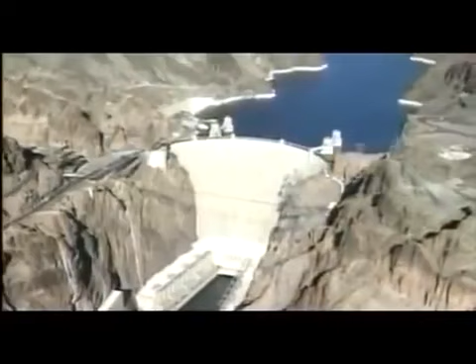726 feet high, weighing 6.6 million tons, and creating a lake 150 miles long, Hoover Dam is impressive and controversial. So were the people who built it: personalities such as the stern Sims Ely, the law of the land, and Frank Crowe, the feared and respected head of construction.

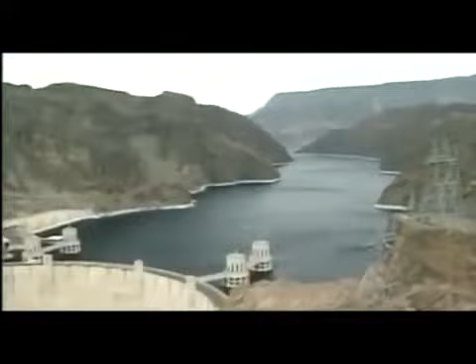Thousands labored to build Hoover Dam. Workers constantly struggled against the environment and often their employers. The damming of the Colorado River created Lake Mead, the largest man-made reservoir in the United States. Ironically, it's located in one of the driest places on Earth, 30 miles southeast of Las Vegas, Nevada.

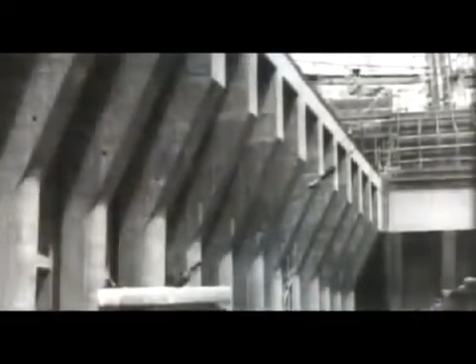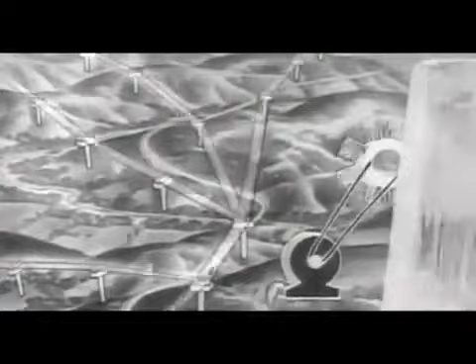Hoover Dam symbolizes the human spirit's discontent to accept nature's rules. Building the Hoover Dam was a colossal undertaking in 1931, the largest government project ever attempted. Constructed in the depths of the Depression, its purpose was to provide flood control, irrigation, drinking water, and electricity. It promised to change barren to bountiful.

Water is essential to life, and nowhere is that better understood than in the dry climate of the American Southwest. The Southwest is an arid area, and without a dam like Hoover Dam to control the flow of the river and make the water available when it's needed, we just couldn't have the level of economic development that we have in the Southwest today.

Thanks to the Hoover Dam, the Colorado River began irrigating more than 1 million acres of farmland. Cities sprouted, and Las Vegas became Las Vegas.

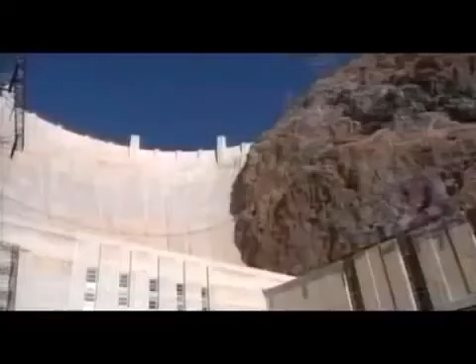Hoover Dam is one of the primary attractions for those visiting Las Vegas. At over 60 years old, it hasn't lost its appeal. More than 1 million people visit the dam a year. Overwhelming in its scope and size, it draws visitors from around the world. The dam's enormity is matched only by its dramatic history.

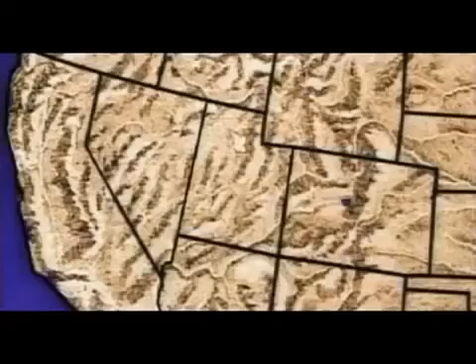The Hoover Dam was the first major attempt to tame the mighty Colorado River, the same river that carved the Grand Canyon. The 1,400-mile river drains water from 7 states: Wyoming, Nevada, Utah, Colorado, California, Arizona, and New Mexico, and delivers its precious payload to the Gulf of California.

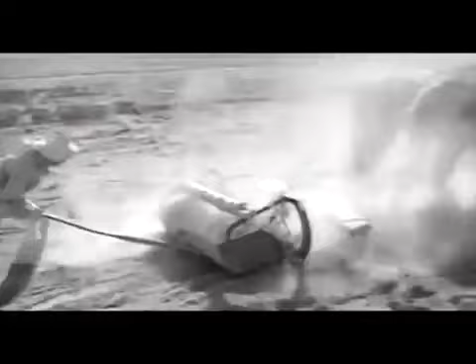Snow melting in the Rocky Mountains sends a torrent of water down the Colorado every spring, but then it dries to a trickle by summer. The early settlers who were trying to build an economy, build lives at the bottom end of this river, planted their crops, built their fields, built homes and businesses.

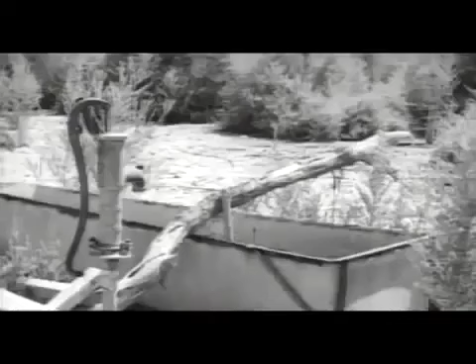In the spring times, those would be subject to inundation or destruction because of the floods coming down the river. And by the end of the summer, when the farmers really needed that water to get their crops to maturity, they couldn't get to the water. They needed a way to regulate the flow of the river, holding back the devastating floodwater in spring and delivering the life-giving water in the dry summer.

Man's attempts to harness the power of the Colorado River date back a century. In 1901, a private company constructed a canal system that brought water from the Colorado River and delivered it to the arid but fertile Imperial Valley of Southern California. California Development Company promised bountiful harvests in what was once barren desert. Irrigation would make it possible.

The company cut an opening in the western bank of the Colorado River and installed a headgate which controlled water flow. Initially, the system of small gates and channels worked beyond expectation. Fields produced a bounty of fruit and vegetables. It appeared as though the canal system was a major success.

Soon thousands of people flocked to the Imperial Valley with dreams of finding a new Eden. But their dreams soon turned into a nightmare. After several years of prosperity, the unpredictable Colorado unleashed its vengeance, reminding settlers how dangerous it was to play with nature's plumbing.

The problem was these were not very well engineered works, and they weren't very good. And the Colorado River in 1905 had a major flood come down the river, and it washed out these headworks and flowed into the Imperial Valley for 18 months.

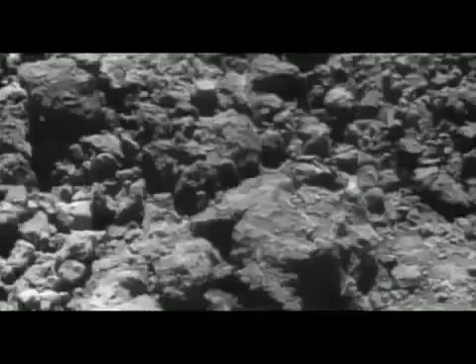Before the measure could proceed, the states had to decide on an equitable division of water. Water meant agriculture, cities, industry, growth, and inevitably there was some disagreement. Arizona believed California was trying to steal an unfair share of water. There's always a fight over water in the West. When water is scarce, there's going to be tension over water, and that was the case years ago. It's still the case today.

Herbert Hoover, then Secretary of Commerce, stepped in to break the stalemate that developed between the states. In 1922, 7 states signed the Colorado River Compact, which divided water rights to the river. However, the Arizona State Legislature, still not satisfied, successfully blocked legislation for several years. But finally, in 1928, the Boulder Canyon Project Act passed in Congress. It called for a high dam near a small railroad town named Las Vegas, Nevada.

The Bureau of Reclamation worked to design a dam like no other. The challenge was to design a structure capable of holding back trillions of gallons of water, built in a very high, yet narrow canyon. They considered 30 different designs before finding the answer. The final plan, a mammoth arched gravity dam.

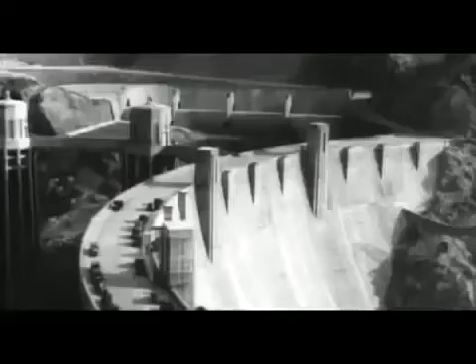Hoover Dam is a combination of gravity and arch dam. Gravity dams are dams that are just so massive, their own weight can hold back the weight of the water behind them. And then arch dams traditionally are built in the shape of an arch. It's kind of like an eggshell. An eggshell is very thin, but the egg itself is very strong. If you try to press in on the 2 ends of an egg, you'll find that you can't crush an egg. It's the strength of the arch.

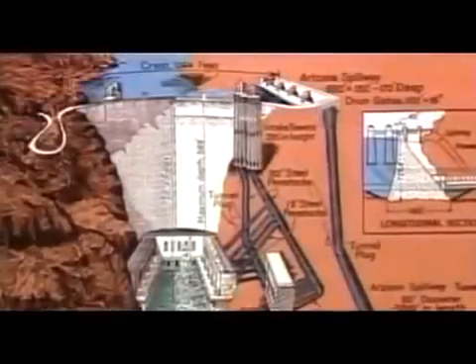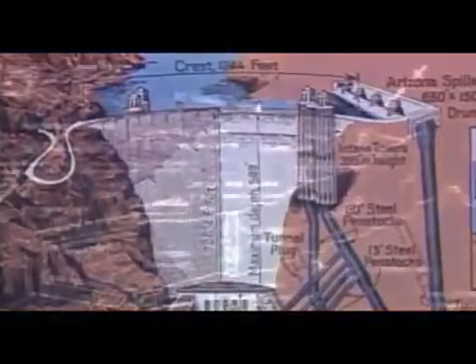The Bureau of Reclamation's planned arched gravity dam would be a behemoth, as tall as a 70-story skyscraper, over 2 football fields thick at the base, and capable of storing trillions of gallons of water. It would not only be the largest dam in the world, it would easily be the single biggest construction project in the history of the United States.

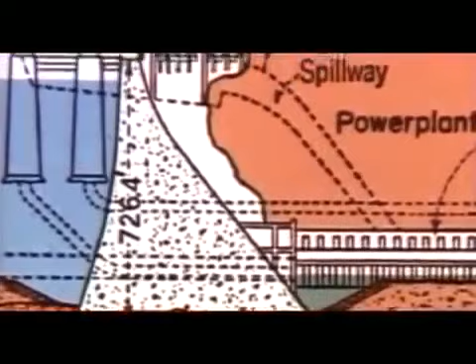But the immense size of the proposed dam was not the only obstacle. The dam would be located in one of the most desolate areas in the world. There was nothing here. I sometimes question the audacity of the people who had the courage and conviction to think they could build a dam out in the middle of a desert where nothing existed. There were no roads to the site. There was no power to the site. There was no labor force here. There was nowhere for the people to live who were going to come and build the dam.

In spite of all the obstacles, the dam had to be perfect, capable of handling even the greatest floods. If it were to fail, a wall of water would race down the river, killing thousands. Surveyors decided to move the location from Boulder Canyon to Black Canyon, 8 miles downstream. The move would allow for a bigger body of water, the largest man-made reservoir in the world.

Congress gave the go-ahead to begin construction. The task was great: hire an army of thousands, divert the river around the dam site, and form a mountain of concrete into a dam in the middle of nowhere. The question remained, could it be done?

Lake Mead, the reservoir created by Hoover Dam, contains enough water to cover the entire state of Pennsylvania with 1 foot of water. Hoover Dam will return on Modern Marvels.

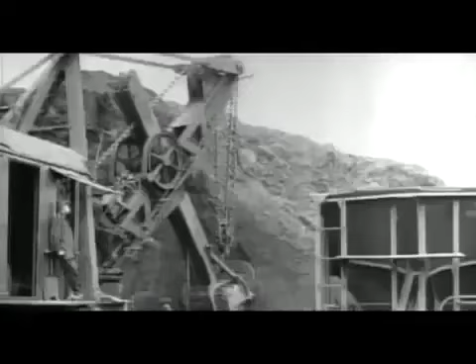In 1930, the Bureau of Reclamation's plan for controlling the Colorado River was extensive. The government would provide materials and certain services for the dam, but the dam would be built almost entirely by the lowest bidder from the private sector. But before the lowest bidder was determined, the federal government began working on the project. Good news for a nation entering the Great Depression.

The Bureau of Reclamation's first objective was to connect by rail Las Vegas to Black Canyon, the site chosen for the dam. Although the site had changed from Boulder Canyon to Black Canyon, the endeavor was still called the Boulder Canyon Project. People naturally anticipated the name would be Boulder Dam. The location switch caused some confusion, but at a railroad spike driving ceremony, Ray Wilbur, Secretary of the Interior under President Herbert Hoover, set the record straight.

Secretary of the Interior Ray Lyman Wilbur came out to drive the Silver Spike to begin construction of the railroad spur from Las Vegas out to Boulder City town site. And that day is the day he announced, well, we're going to call it Hoover Dam.

This was a year after the stock market had crashed and the Depression was settling in, and people were not at all happy with Hoover.

Despite the public's disapproval of President Hoover, they welcomed the job opportunities. People were desperate for work. Soon, thousands poured into the Las Vegas area in hopes of finding employment. Before the construction started, before they hired anybody, they came because they knew there was a chance of a job, just a rumor of a job.

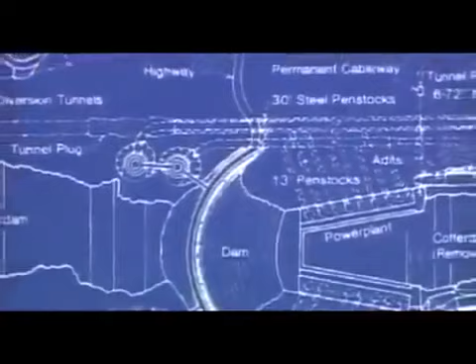The Bureau of Reclamation supplied plans to anyone interested, and it seemed everyone was interested in the largest government contract ever issued. The blueprints detailed an immense structure, taller than any dam in the world, 726 feet in height, and nearly as thick at the base.

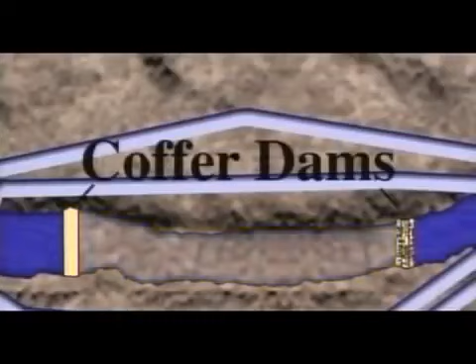The process of dam building called for tremendous diversion tunnels, 50 feet in diameter, to alter the course of the river, temporary cofferdams to provide a dry work area, and the pouring of 3.25 million cubic yards of concrete.

Nothing existed at the dam site. Concrete mixing plants, cooling plants, living quarters for 5,000 men and their families, cableways and metalworks had to be constructed.

The sheer size of the project intimidated even the most confident contractors. Build the largest dam in the world in the middle of the desert and do it in less than 7 years, the government-imposed deadline. There wasn't any company in the United States that was big enough to handle the dam.

So there were 6 contractors that got together and formed the consortium of 6 companies. Six Companies was composed of 6 giant construction firms, united for the sole purpose of bidding on the Boulder Canyon project. Each of the firms was familiar with big projects.

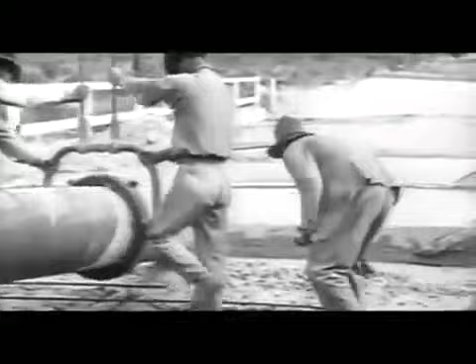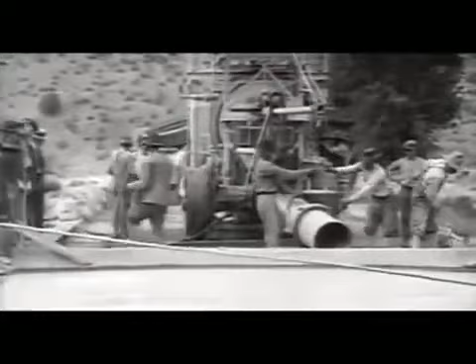They independently shaped the West, building railroads, tunnels, bridges, and highways. Between the six, perhaps they had enough experience and resources to build a dam of such great magnitude, but they needed someone who was respected in the field of dam construction to oversee the project, someone the Bureau of Reclamation would feel confident could get the job done.

They chose Frank Crowe to be their foreman here, the superintendent of the job. And he was a hands-on foreman. He didn't spend much time behind his desk. Frank Crowe was the most respected dam builder in America.

With him on board, Six Companies was ready to make a bid for the dam construction. On March 4th, 1931, the Bureau of Reclamation opened sealed bids. Of the hundreds of interested parties, there were only a handful of qualified bidders.

Tension ran high as each of the bids were opened. The Six Companies firm won the contract with the lowest bid of $48,890,955. It was the largest government contract ever awarded.

Blasting began almost immediately. Six Companies had their work cut out for them.

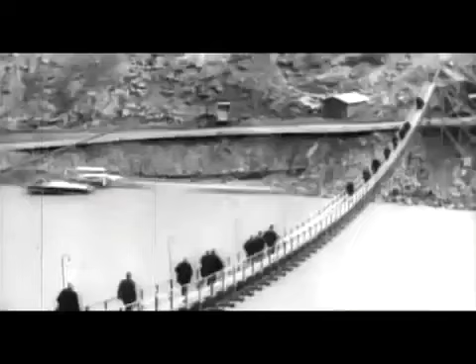Initially, even getting to the dam site was an obstacle. There were no roads from the rim to the bottom of the canyon. Men instead took small ferries to the dam site. Later, cableways were erected across the canyon to get men and materials to the bottom.

The first monumental task was diverting the river around the dam site. Engineers needed a dry work area in which to set the dam.

To add to the pressure, the Bureau of Reclamation initiated stiff fines for missed deadlines at each stage of construction. Four tunnels had to be drilled through the canyon walls to circumvent the site. The gigantic 56-foot tunnels averaged three-quarters of a mile in length and would carry the entire volume of the Colorado River. Workmen drilled blasting holes and loaded them with dynamite.

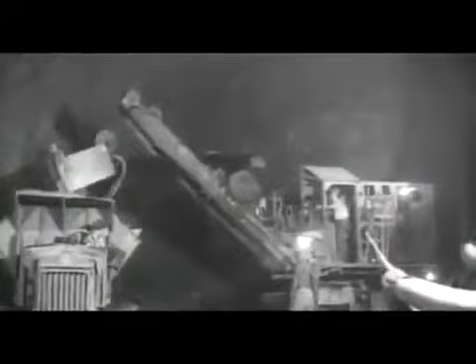A special three-story truck holding drillers at three different levels expedited the process. Digging continued for 13 months, drilling, blasting, and removing millions of cubic yards of debris. An endless stream of trucks removed blasted rock from the diversion tunnels and labored up a steep incline for disposal. Three shifts of men worked 24 hours a day, 7 days a week to keep the tunnels on schedule.

Frank Crowe was responsible for keeping things moving. The hectic pace of construction had its consequences. Heat exhaustion cost 14 men their lives. After the Depression and the crash, it was so difficult to get a job. Companies like the Six Companies could easily afford to cut a lot of corners in terms of safety and health of their workers, in terms of pay, in terms of comfort, and they did.

Tensions came to a head in the scorching summer of 1931. Striking workers demanded better working conditions, fresh water, and improved safety precautions. Six Companies responded by firing 1,400 strikers and hiring fresh workers readily supplied by the Depression. Frank Crowe was known as a fair man, but his hands were tied by the other members of Six Companies. However, soon after the strike, working conditions began to improve. In the end, when confronted with having a rough job or going hungry, most opted for the employment.

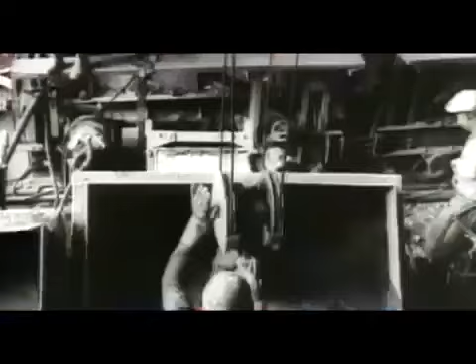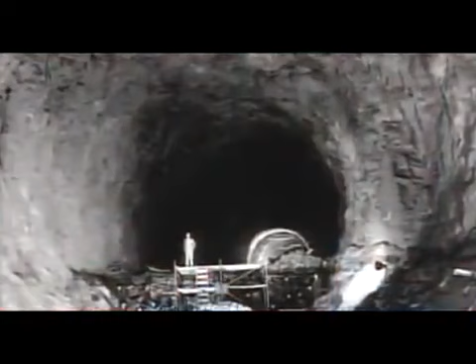More than 5,000 men worked on the dam at the height of construction. Frank Crowe, anxious about deadlines, often questioned their output. He used to take the VIPs around and give them a tour. Well, one of these wives of one of the people he was giving the grand tour asked, 'Mr. Crowe, how many men do you have working here?' He said, 'About half of them.' But Frank Crowe didn't kid when it came to deadlines.

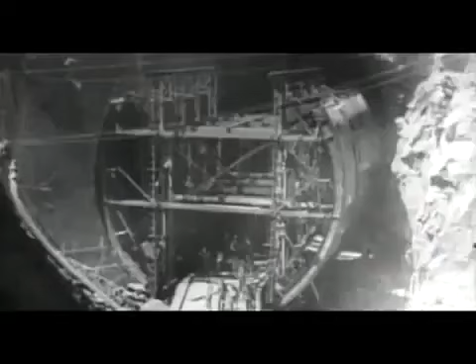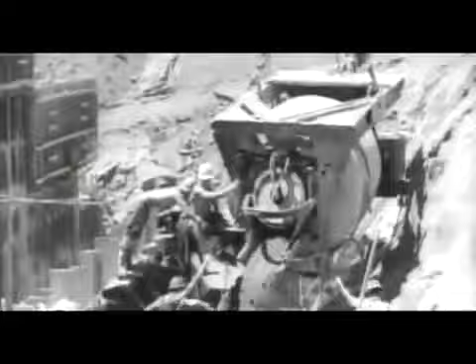His hard-working team completed the diversion tunnels months ahead of schedule. In only 14 months, after digging the diversion tunnels, workers lined them with 3 feet of concrete. Special forms of gigantic proportion moved along the interior of the tunnels. But the job had just begun. They still had to force the river through the tunnels, build the powerhouse, intake tunnels, and the colossal dam itself. The most dangerous stage of construction was completed, but the most spectacular work was yet to come.

112 people lost their lives working on Hoover Dam. Ironically, the first and last persons killed, J.G. Tierney and P.W. Tierney, were father and son.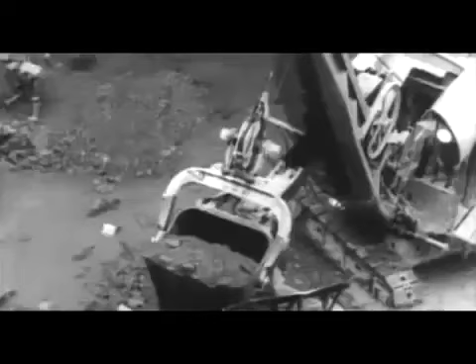It wasn't machines that built Hoover Dam, it was men. People with different job titles: powder monkeys, muckers, and high scalers. A labor force of thousands blasted, dug, hauled, poured, dumped, loaded, and cleared the site in preparation for the dam.

As work on the diversion tunnels progressed down below, more breathtaking work took place high above. Canyon walls required smoothing and shaping for the abutting dam. Men blasted thousands of cubic yards of rock from the sheer canyon faces. In daring acrobatic displays, high scalers swung from ropes to accomplish the bold feat.

That was a job that I imagine and just freak about it. And we're talking about a canyon that's 700 and some feet deep, from the top to solid rock at the bottom. They would hang on what they called bosun's chairs, just little wooden chairs. They would drill the holes that would later be blasted. Then they would go back down with their picks and scale off all of that rock. And that was their job.

When dam construction began, the government wanted the high scalers and all employees out of the squatter-style camps and into more suitable accommodations. Six Companies labored to provide housing for their workers as quickly as possible and built Boulder City, 7 miles from the worksite.

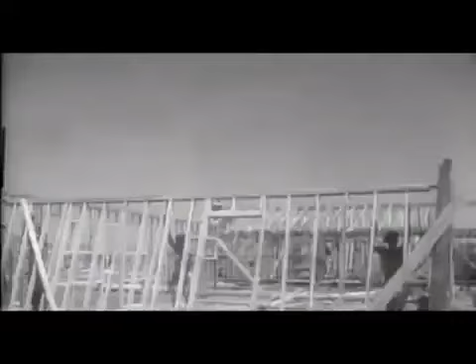Men framed as many as 3 houses a day, and stories abounded of people coming home from work and mistakenly entering the wrong home. They built everything that a city should have. It would have a movie theater, entertainment, schools for the children.

It would have churches for people to go to. Boulder City was a normal city in all senses, except that it was a government reservation. The federal government had full authority in the town. The Secretary of the Interior, Ray Wilbur, appointed Sims Ely to manage the city of 7,000 residents, a man who commanded respect. Sims Ely acted as judge, mayor, and Chamber of Commerce.

He decided who would be given business licenses and what type of business they could have. Unlike many others during the Depression, people in Boulder City had a little money to spend. By choosing which businesses were allowed in town, Sims Ely determined for his workers how to spend their money more responsibly. Six Companies paid their workers half in real money and half in scrip. The only place you could spend this scrip was in the Six Companies store.

As city manager, Sims Ely was also responsible for enforcing the law. There would be no alcohol or gambling within the city limits. Responsible for several thousand young men, Ely had a big chore on his hands, but federal marshals helped him with the seemingly impossible task.

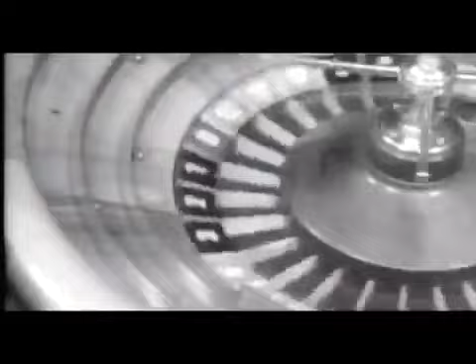Boulder fueled the commerce and growth of Las Vegas. And like the international attraction it is today, Las Vegas accepted all varieties of currency. The workers would go down to Las Vegas onto Block 16, which is the red light district, and they would drink and they would gamble and they would get serviced in the houses of prostitution along Block 16, and they would pay for it with the scrip.

Then the prostitutes would take the scrip they earned, come back up to Boulder City with it, and go shopping. Being 30 miles from Las Vegas emphasized the fact that Boulder City was a haven. There was no crime in Boulder City, and to many it was a paradise, a sanctuary, free from the evils of the outside world. It was a model town. It was perfect, it was meant to be perfect.

You couldn't have any kind of alcohol. You better not. They had a gate outside town, and if you got stopped there with alcohol, they arrested you on the spot. We didn't know anybody in poverty. If someone wasn't working, they weren't here, and so we didn't know what poverty was.

Boulder City offered security, shelter, and a full belly. Stories about food were legendary. Food was good, and there was plenty of it. When others were starving, workers in Boulder City feasted on 3 square meals a day. The Anderson Brothers mess hall served as many as 1,300 men per seating. A staff of kitchen helpers scurried around in a flurry of activity, preparing as many as 6,000 meals a day.

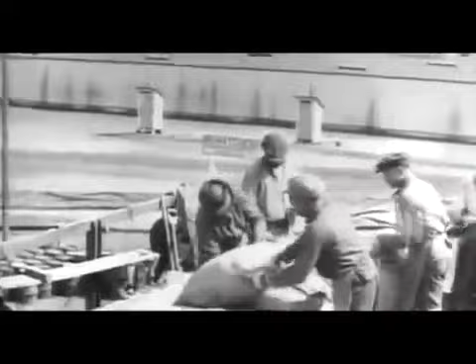Six Companies did the hiring. Less than 1% of dam employees were black. The few who did work on the dam were given the least desirable positions. The new Secretary of the Interior, Harold Ickes, hoped to alter the situation, but he didn't have authority to change Six Companies' hiring practices. He did, however, have authority in Boulder City. He announced in 1933 that the few black employees could live there. It was a minor victory for the black employees who found discrimination a way of life.

Herbert Hoover, champion and namesake of the dam, only visited it once in 1932. Hoover Dam will return on Modern Marvels.

While Herbert Hoover's administration began Hoover Dam, Franklin Delano Roosevelt's had to finish it. Hoover lost in a landslide to Roosevelt and his New Deal, but the new president continued supporting the dam and the thousands it employed. What Roosevelt didn't like was the name, Hoover Dam.

Named after the former president, Hoover Dam had a serious identity crisis. Originally called Boulder Dam, even though it wasn't built in Boulder Canyon but in Black Canyon, it was then changed to Hoover Dam. Harold Ickes announced on May 8, 1933, the name would change yet again back to Boulder Dam.

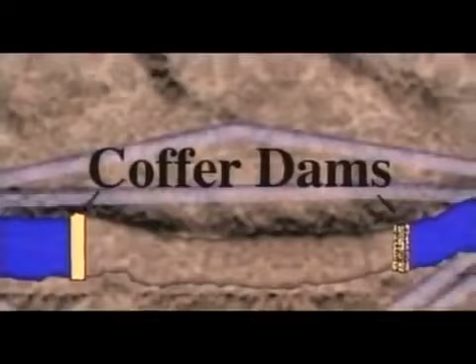Two temporary dams called coffer dams were erected to create a dry work area, one just below the diversion tunnel's inlets and the other just above the outlets so water wouldn't back up into the site. For 5 months, trucks dumped rock into the river, forming two enormous dams, the larger one being 100 feet tall and 750 feet thick at the base. Water was then pumped from between the dams and excavation began.

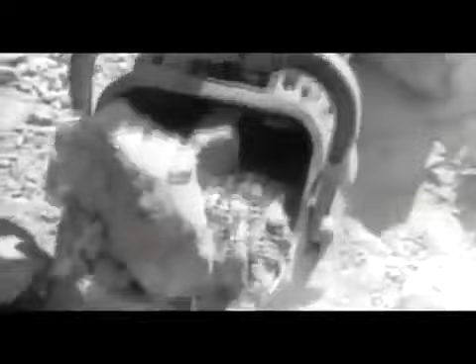Excavation was a monumental undertaking. More than 40 feet of rock, sand, and silt had to be removed from the now dry riverbed. Steam shovels dredged 500,000 cubic yards of material in preparation for pouring concrete. And on June 6, 1933, the first bucket of concrete poured into the form at the bottom of the canyon.

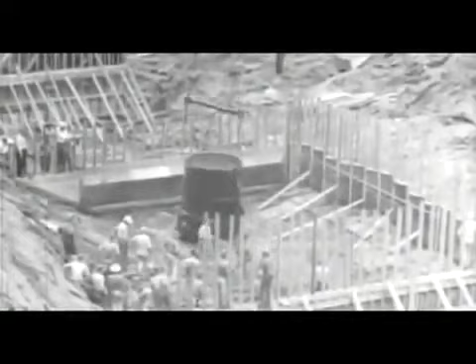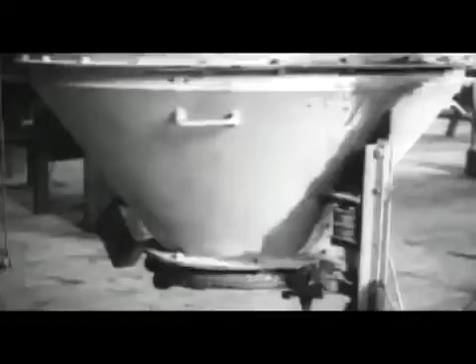Producing enough concrete for the dam was a problem in itself. Hoover Dam required nearly as much concrete as all previous Bureau of Reclamation dams combined. A two-lane highway from San Francisco to New York could be built with the concrete used on Hoover Dam.

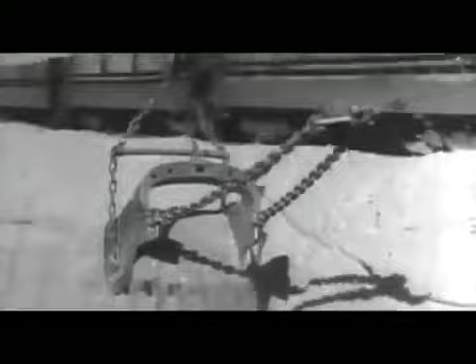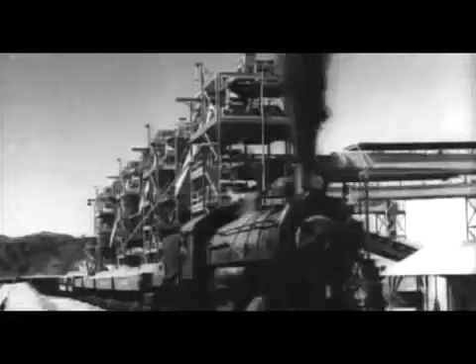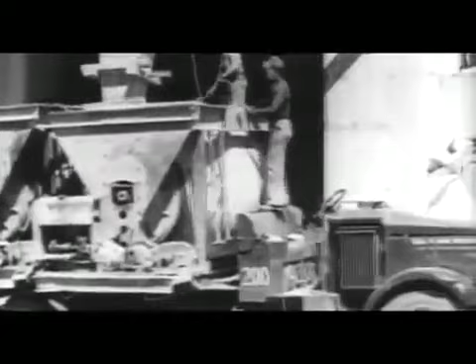A nearby riverbed provided the gravel. Men loaded material into train cars and transported it to the separating plant, where it was divided by size. Trains then hauled gravel to the two mixing facilities built to produce the tremendous amount of concrete. Night and day, concrete left the mixing plant, truckload after truckload, bucket after bucket, for placement in the dam forms.

It's not a monolithic piece. It's poured more like a kid's Lego toys that lock together like that, and they poured grout in between those. So they poured it in individual blocks. The dam was poured in forms from 25 to 60 feet square and 5 feet deep.

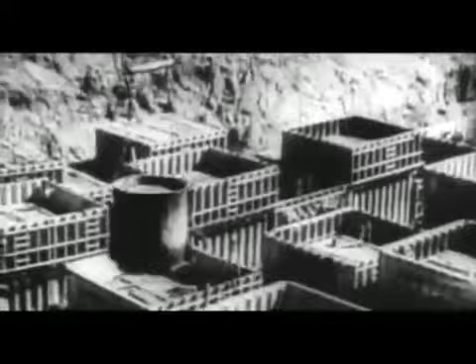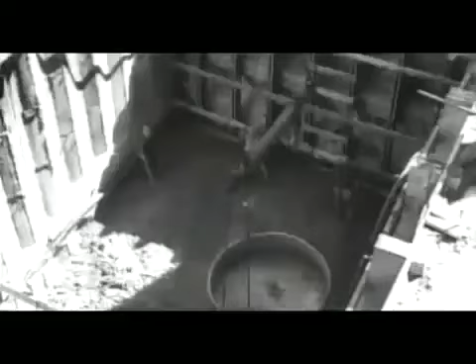If poured as one massive block, not only would it be inclined to crack, but it would take over 125 years to completely harden. The chemical reaction of hardening concrete also produced heat, and too much heat would cause the huge concrete blocks to crack. So steel pipes were inserted into the wet concrete and cold water pumped through the pipes to slow the curing process and reduce cracking. After a few days of hardening, a block could be poured on top or adjacent to it.

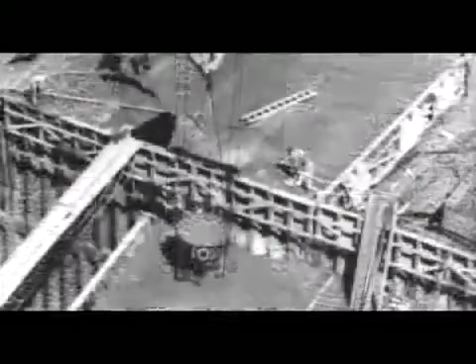A project of such magnitude and strict deadlines required innovative construction techniques. Frank Crowe pioneered the extensive use of cableways on earlier projects, but never before had cableways been used so efficiently. From an eighth of a mile above, cableway operators choreographed a ballet between men and machine.

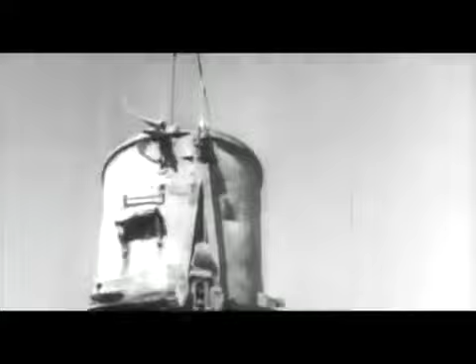Train cars transported concrete buckets from the mixing plant. Cableway operators lifted the 22-ton buckets and sent them gliding to the appropriate form. There, men released the safety locks and 16 tons of concrete poured into the form. Activity progressed 24 hours a day, 7 days a week, pouring up to 1,100 buckets of concrete per day.

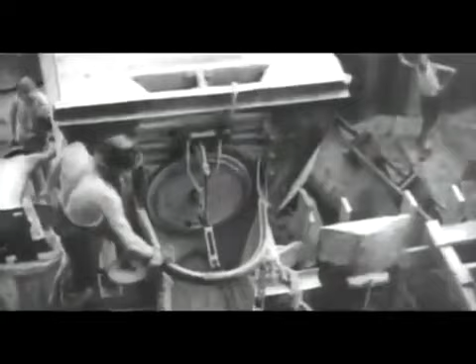The aerial cableways weren't the only innovations at the dam site. We believe that this is where the hard hat was invented that everybody uses nowadays. The construction workers had been faced with debris falling on them from above, and they realized they were going to have to do something.

And so what they did was they put two baseball caps together like this, with the bill going this way and this way. And then they took it and dipped it in tar, took it out and dipped it in tar again, and let it harden, dipped it in tar, and let it harden.

And these were all homemade hats. The company didn't have anything to do with this. But when several men wearing homemade hats were saved from falling debris, Six Companies purchased thousands of hard hats for their employees. As the dam steadily grew in height, the splendor of its design was undeniable.

When you think of the construction of that dam, most of us were working specifically at some particular job, and we really didn't have a picture of what was happening around here or what was going to happen. To me, it was a fascinating time, to come down there every day and just see that dam gradually going up.

Concrete pouring pushed the dam higher and higher. As it grew taller, so did the tales surrounding the project. Despite rumors, no one is buried in the concrete. A decomposing body would threaten the integrity of the dam. Besides, an average pour only increased the depth in the form a few inches.

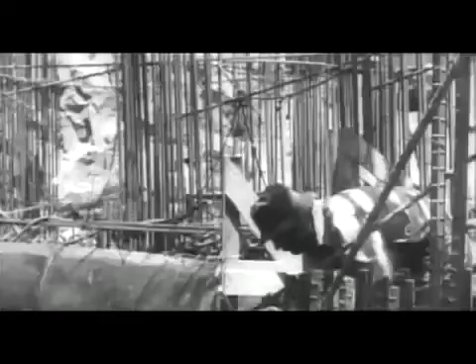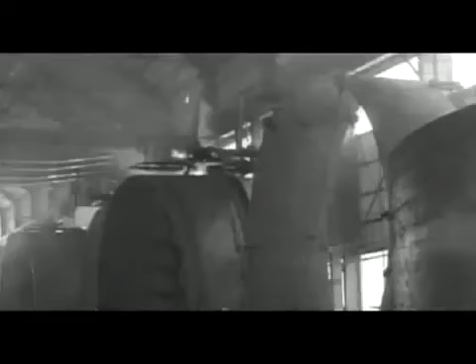While the concrete was being poured, there were several ancillary projects happening simultaneously. 4 water intake towers were built in front of the dam. Giant steel pipes called penstocks connected to the intake towers and would funnel water to the generators and through the dam. Penstocks provided the internal plumbing of the dam and were as large as 30 feet in diameter.

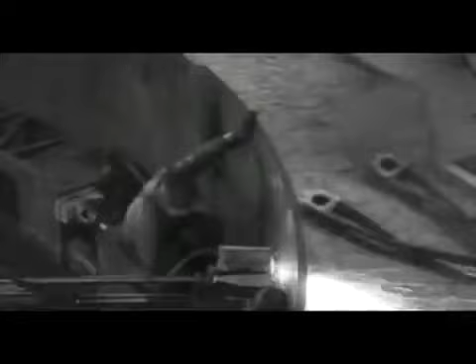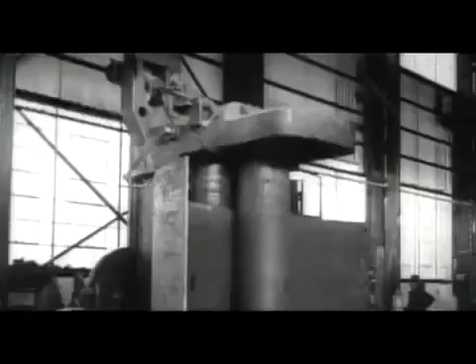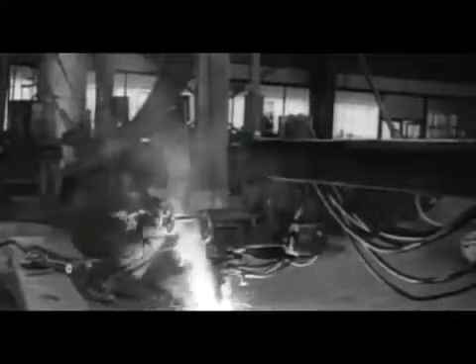Producing these massive pipes tested the resources of the day. They were too large to ship. Workers instead erected an entire fabrication facility at the dam. Giant presses rolled 2 3/4-inch steel plates into 11-foot pipe sections, weighing 80 tons each. 2 pieces combined to make one colossal section, 22 feet long. Tractors moved the enormous sections to the canyon rim, where the largest cableway floated them to the base of the dam. Each section was joined to other sections, forming over 1 mile of welded pipe.

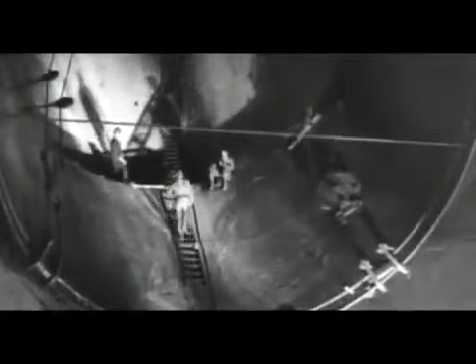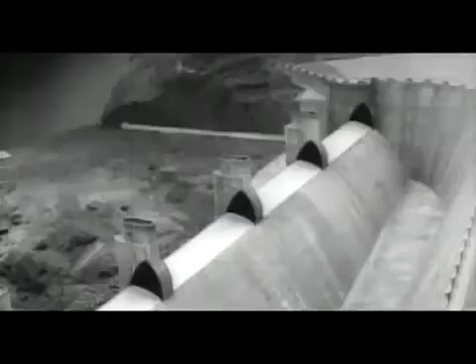In front of the dam, engineers designed spillways to protect it in times of great flooding. Water would flow into the spillways instead of overflowing the dam. Only twice were the spillways used, once for testing and the other in 1983 during an exceptionally wet spring. That year, water flowed over the spillways at 52,000 cubic feet per second. Despite the record water flow, the spillways performed as designed more than a half-century earlier, and flooding downriver was minimized by the efficiency of the Colorado River system.

With the spillways constructed, the dam was one step closer to completion and the fulfillment of its purpose. But there was a lot at risk. Filling the lake would be the only way to test the dam. At that point, structural failure would be catastrophic.

The weight of water filling Lake Mead caused many earthquakes in the Boulder City area, some measuring as great as 5.0 on the Richter scale.

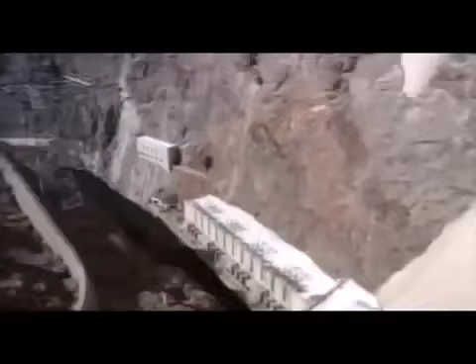The elegance of the design was no accident. Notable artists brought a touch of class to Black Canyon. Gordon Kaufmann was a very famous architect who is the one really responsible for the whole Art Deco appearance of the dam. He's the one that was brought in and designed the very sleek, angular, geometric lines and planes of it, which make it such an interesting and unusual structure in itself.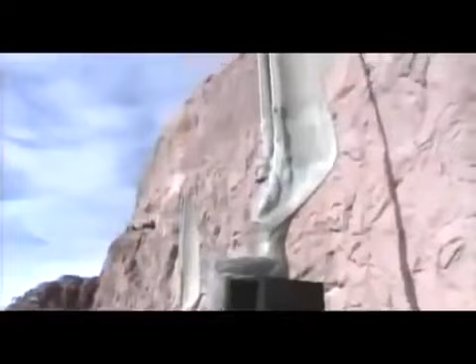The Art Deco design is found on the inside as well, from the elegant visitor elevators and aluminum doors, decorative railings in the powerhouse, and terrazzo floors inspired by Native American design symbolizing the power of the dam. And protecting the dam are the winged figures of the Republic, designed by Oskar J.W. Hansen.

By the summer of 1935, the men of Boulder Canyon accomplished something amazing: the completion of concrete pouring 2 years ahead of schedule. What stood in the narrows of Black Canyon was a monument to Frank Crowe and the men who built it.

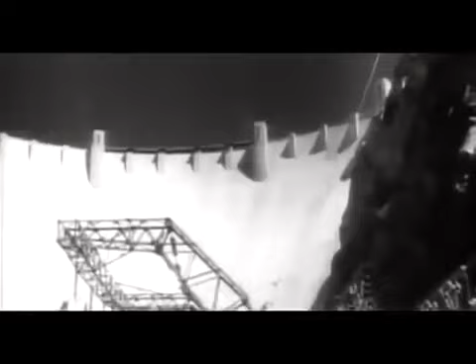To accomplish what Frank Crowe did, 2 years ahead of schedule and under budget, he had to be a tremendous individual. Maybe not loved by everybody, but he certainly set out to build the dam, and he accomplished that. Frank Crowe went on to do other projects for the government, but Hoover Dam was his crowning achievement.

The time we completed it, I just felt that I had been a part of something that was just tremendous.

On September 30th, 1935, President Franklin Delano Roosevelt came to the desert of the Southwest to dedicate the dam that so many had worked so hard to complete. On that day, President Roosevelt dedicated Boulder Dam, but from its inception there was confusion over the name of the dam. First Boulder, then Hoover, then back to Boulder, but finally, in 1947, an act of Congress changed the name back to Hoover Dam, and it remains that today.

Four months before Roosevelt's dedication, Lake Mead began filling. It took 6 years to reach maximum capacity, and the mighty structure successfully held back trillions of gallons of water.

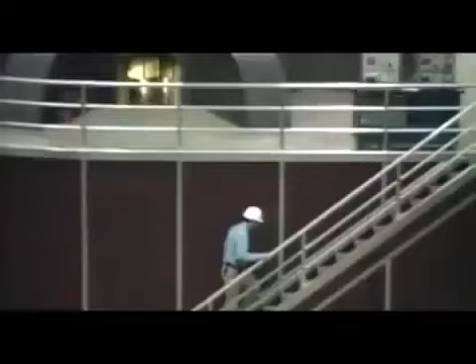Water that could now be used to produce electricity. Water from Lake Mead flowed in through the intake towers to turbines, which in turn rotated generators, producing such a massive amount of electricity that by 1987 the power produced completely paid for the dam plus interest. We have a service area, including all of Southern California and Arizona, probably more than 20 million people that receive some of the power.

The river had been tamed, flood devastation minimized. Crops grew in a once barren desert, and electricity was generated. Men had altered Mother Nature's design, but did they improve it?

There are no negative effects that were known at the time construction occurred. Obviously, as we've learned more about river systems and become more sensitive to environmental issues, we've learned that the natural environment is certainly affected by dams. Dams change the natural flow of rivers and inevitably impact plants and animals.

More fish live here than ever could before. More animals, mountain sheep, birds, mountain lions, because the one scarce element, the one thing that was missing from this environment, water, is now here 24 hours a day, 7 days a week.

In spite of the abundance of wildlife, certain native species of plants and animals were negatively affected by damming the Colorado. Altering the natural habitat has led to the absence of many species within the Colorado River. Some native fish have found reproduction more difficult in the colder waters of Lake Mead.

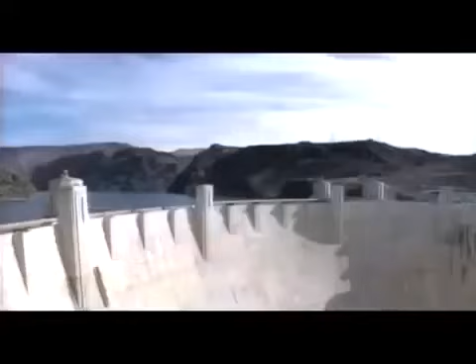Seven miles from Boulder City, at the top of the dam, sits a $125 million visitor center, built for the more than 1 million visitors who stop at Hoover Dam a year. Constructed in 1995, architects tried to match the elegance of the dam.

Money generated from site tours will pay for half of the visitor center's cost. For a few dollars, visitors get an intimate look behind the curtain of concrete.

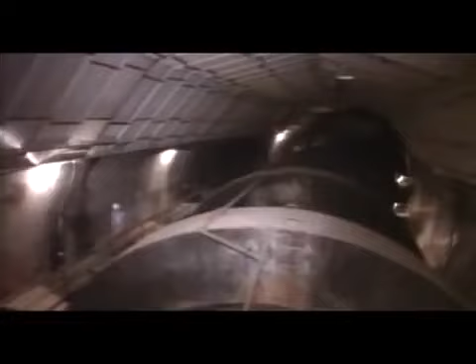In addition to dam visitors, 8 million people a year enjoy the recreational benefits of Lake Mead. Named after Elwood Mead, the former commissioner for the Bureau of Reclamation, Lake Mead is the largest man-made reservoir in the country.

A problem that accompanies many reservoir systems is silting, or the building up of sediment at the bottom of a reservoir. Flowing water carries sediment with it, and if enough sediment collects, it can fill a reservoir, rendering it useless. But with the help of large reservoirs like Lake Mead and 53 Bureau of Reclamation dams helping to trap sediment, silting is minimized on the Colorado River system.

But the U.S. isn't the only benefactor of the Colorado's bounty. Despite past disagreements about water quality and quantity, Mexico receives 1.5 million acre-feet of water a year downstream from Hoover Dam.

Engineers designed Hoover Dam to provide many benefits, but they could not have foreseen the impact the completed project would have on people and the environment. From the close-knit community of Boulder City to California's fertile Imperial Valley, the Hoover Dam has changed the course of a river and the course of people's lives.

I think it symbolizes what the American people were about in that particular time in our history. We were moving to new frontiers. We were settling the West. We were building a...